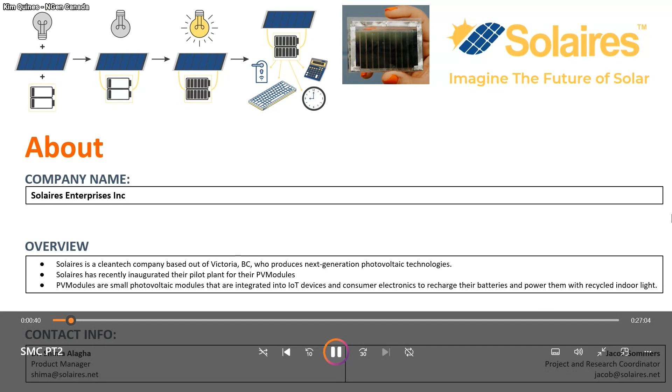With the success of this internal recycling project, we can develop perovskite photovoltaics which cost 75% fewer GHGs to manufacture than traditional silicon photovoltaics. This proposal targets recycling the specialized glass from devices which do not pass QC during manufacturing, or those which are recycled from their natural end of life. These recycling processes will require large amounts of solvents, which this project aims to recycle as well.

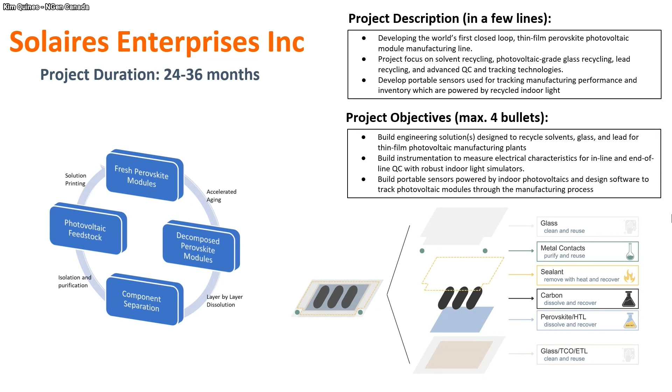In order to maximize our manufacturing efficiency and therefore reduce our GHG impact, we are looking to implement smart tracking and automated quality control measurements. Today, we are looking for partners in this project who will join us in this task.

We are looking for a company specialized in chemical recycling who will develop the world's first commercial thin-film photovoltaic recycling machinery. We are also looking for a company who will help us build inline and end-of-line QC tools specifically targeting indoor photovoltaics, which would include photoluminescence spectroscopy and current voltage testing.

We are also open to partners with projects and ideas which will support closed-loop smart manufacturing, but we have not considered. We are eager to hear your thoughts and discuss where we can expand this project to include your solutions.

You're on mute, John. John, you're on mute. Thanks, Roshan. Okay, thank you for that.

So the next pitch is Terra Bioindustries, an Ontario headquartered company designed to create multi-industry solutions from agri-food waste. They've developed a platform that can break open the grains and separate the valuable components without compromising functionality. So let's hear Terra Bioindustries.

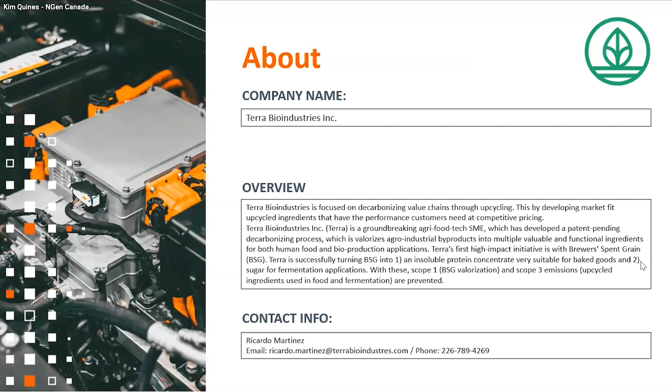We have already demonstrated our brewer's spent grain upcycling process at a pilot scale, and we have sent upcycled products to potential customers for detailed evaluations. Therefore, our project for the NGen Sustainable Manufacturing Challenge aims to implement and validate a full circular demonstration.

Where the unused part of the grains used in beer production is recovered, then upcycled using our energy-efficient process and converted into two ingredients: a plant-based protein, which we've named Proteina, and a sugar, which we have called Recyclose. The plant-based protein is meant to be used in food applications like baking, where it can substitute carbs with protein and fiber, therefore making sustainable and healthy food applications.

And the sugar will be used in fermentation applications like beer brewing, which initially provided the spent grains, closing the circle. Aside from producing two novel ingredients, this project aims to remove more than 30% of the current carbon emissions linked to grain disposal and agriculture intensification. This is because at least 60% of the carbon emissions of these products that these industries create comes from these sources. The amazing thing is that this project will be the first Canadian circular demonstration for food tech decarbonization.

By doing this, NGen contributes to facilitating a transition to sustainable manufacturing for brewing and food industries. For this challenge, we're looking to work together with Canadian breweries, Canadian baking companies, Canadian fermentation companies, as well as technical engineering teams to assist with pre-engineering and project implementation. Thanks everyone for your attention and time.

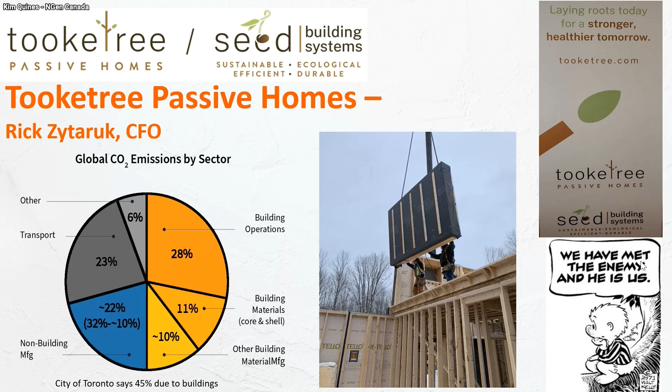Our mycelium hemp composite will be a game changer that addresses both problems. It will drive a major transformation of our building industry to build faster, help mitigate the climate crisis, and minimize the demands on our forest ecosystem.

Unfortunately, building at today's best would require clear-cutting significantly more timber, accelerating the climate crisis through decimation of our vulnerable forest systems. Mycelium can provide the transformative solution we need to build the homes we need, reduce the stress on our forest ecosystem, and still reduce the embodied and operational carbon from buildings.

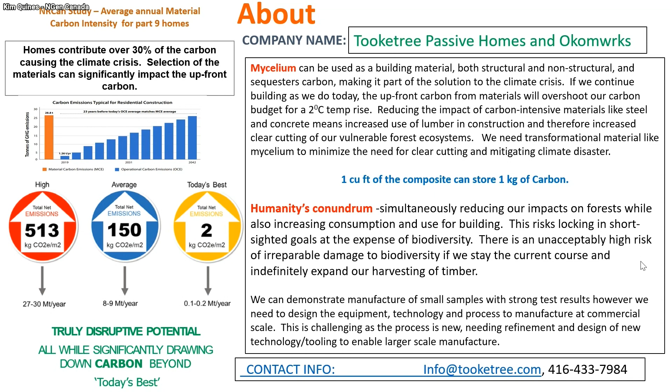We have developed a patented process to create natural building materials using mycelium and hemp, both carbon sinks. Nature generates the building material, which stores carbon for the life of the building. We can make a variety of carbon storing products: insulation to wrap building structures for wall and roof systems, sheathing, cladding, structural components. Currently, we can make small pieces in our research lab.

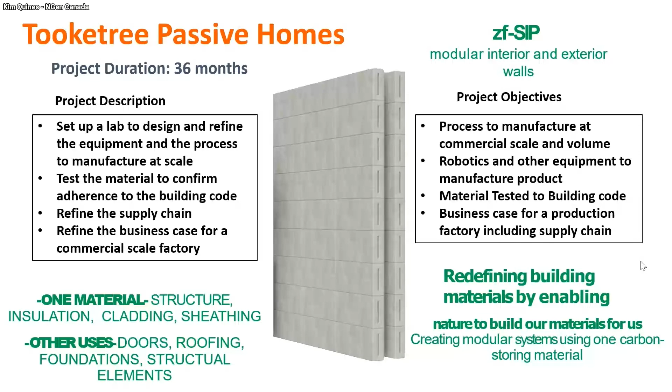This project aims to refine the process and the equipment, tooling, etc., to demonstrate what is needed for commercial scale manufacturing and do the lab testing to validate that the product meets the building code. We believe this material has the potential to revolutionize how we build, how we manage our biodiverse resources, and truly make buildings part of the solution to the climate crisis rather than a major contributor. Mycelium can bridge the gap to the future. Thank you.

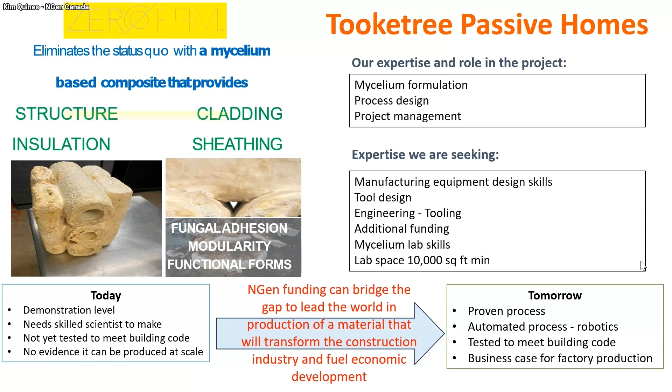Hi, everyone. There's so many fantastic pitches. Our next one is from BioAstra. BioAstra is a company headquartered in Quebec, an award-winning company with a technology platform of smart polymers and composites for health and clean tech applications. So let's have a listen.

Hello and bonjour. My name is Sumitra Rajgopalan. I'm the CEO of BioAstra Technologies, a biomaterials company based here in Montreal, and I'm here to present our bioelastomer platform as an alternative to polyurethane and seek partners in the Canadian ecosystem across the value chain.

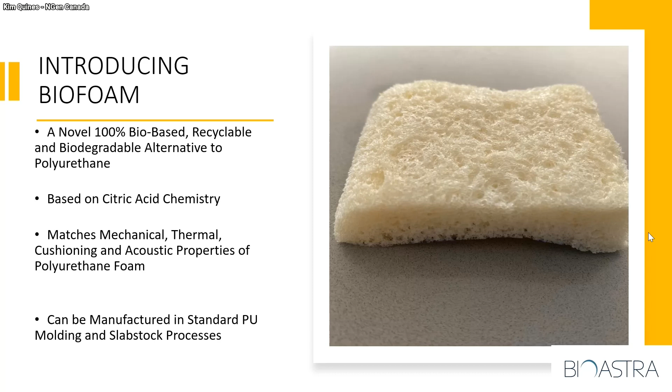Our goal at the NGen Summit today is to seek partnerships across the entire Canadian value chain in polyurethane foam or rubber manufacturing, be it injection molders, reaction injection molders, and slab stock foam manufacturers, as well as brands looking to be early adopters of this technology here in Canada. We'd be equally excited to hear from Canadian universities and other startups looking for other application ideas or to validate the underlying technology in a laboratory setting. We look forward to participating at the summit and to hear from all of you.

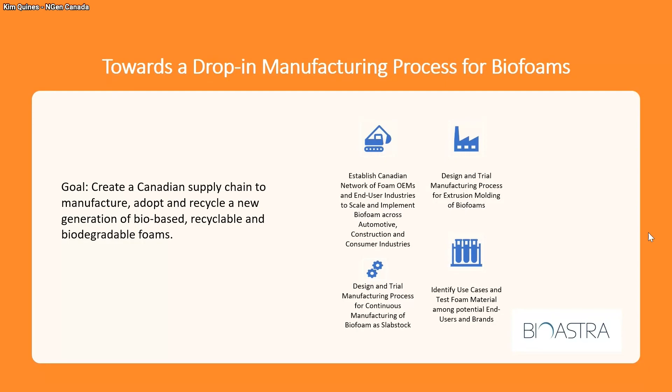BioAstra's role in this project will be as inventors and developers of the biofoam, and we look forward to partnering with foam manufacturers to scale and have this technology adopted by Canadian brands thereafter.

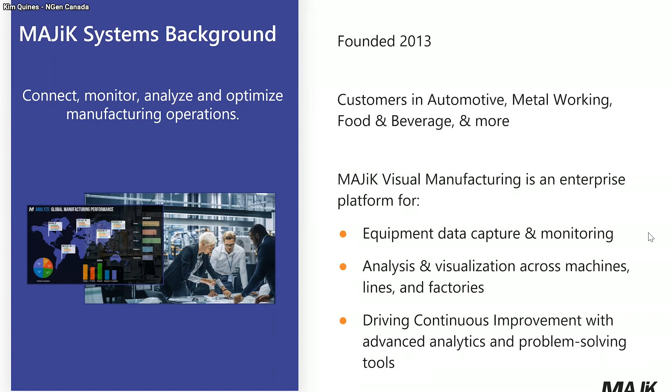Our proposed project would produce an enterprise solution that uses AI to drive best practices across multiple factories to maximize sustainability and efficiency. The objectives of this project include improving uptime and reducing resource waste with a holistic view of maintenance and operational best practices across factories.

Promoting the efficient use of resources and energy by minimizing unplanned downtime, driving waste reduction by highlighting the impact of defects and scrap, and optimizing energy usage by detecting consumption anomalies and their root causes. This will result in a solution that drives the continuous improvement process with AI-guided decision-making to maximize sustainability and efficiency.

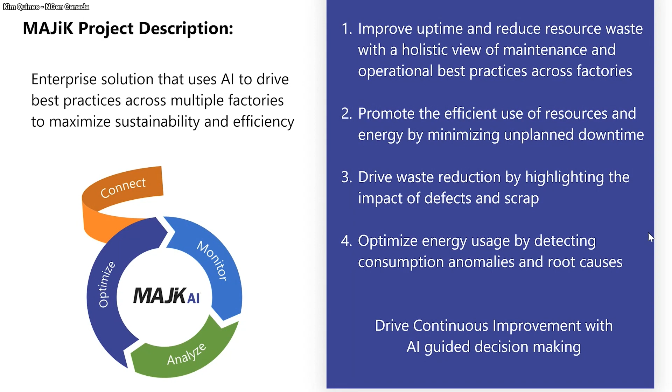MAJiK's specialization in this project includes capturing equipment data and providing a holistic view across machines, production lines, and factories, providing our MAJiK Visual Manufacturing tools to drive best practices, sustainability, and efficiency through a holistic enterprise view, comprehensive factory analytics, and streamlined operator interfaces.

And thirdly, driving key continuous improvement use cases by using AI to guide the decision-making process for improving downtime and energy consumption, maintenance, defects, and scrap.

We are looking to work with manufacturers to build and refine our solution. Ideally, these manufacturers would be in automotive, food and beverage, and metalworking, or other sectors with high volumes of discrete production, as well as manufacturers who have a culture of continuous improvement and a need for digitization, efficiency gains, and improving best practices.

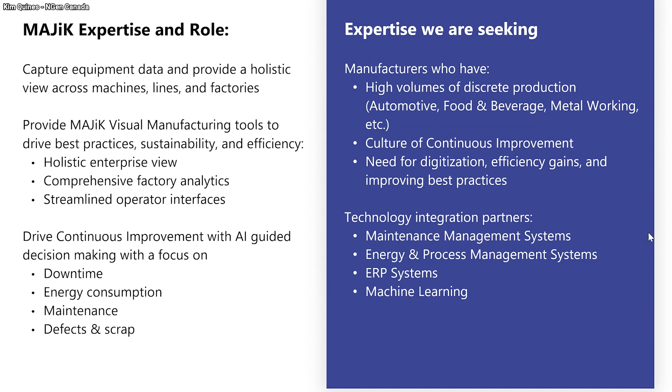We would also like to work with technology partners who are interested in driving their solutions with real-time equipment data. These could include maintenance management systems, energy and process management systems, ERPs, and machine learning solutions. Thanks for listening. We're looking forward to discussing this opportunity to work together.

Wonderful. So our next pitch is from New Earth Solutions. New Earth Solutions is a company headquartered in Ontario that is designing air filtration systems and looking to prove out their solutions in manufacturing facilities. Let's take a listen.

Hey, my name is Mitchell, the co-founder at New Earth Solutions. I'm really excited to share with you our technology because we have a solution to a real-world problem: the air we breathe. Our biological air filter leverages beneficial microbes located in the root zone of plants to metabolize and break down volatile organic compounds into non-harmful compounds.

We work with ASHRAE standards, specifically the indoor air quality procedure, to implement filtration inside of a building and reduce ventilation while still meeting adequate indoor air quality levels. Everything's been third-party tested through National Research Council of Canada and in compliance with the requirements of ASHRAE.

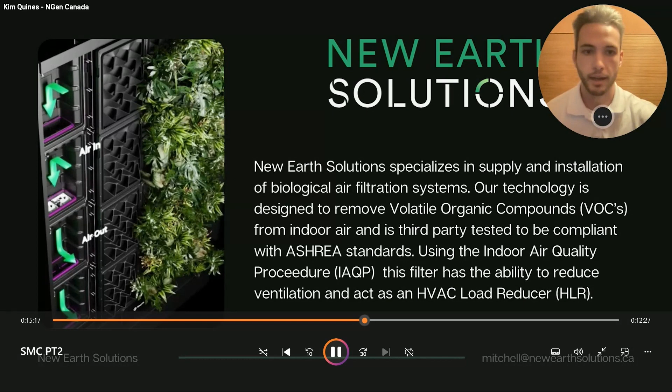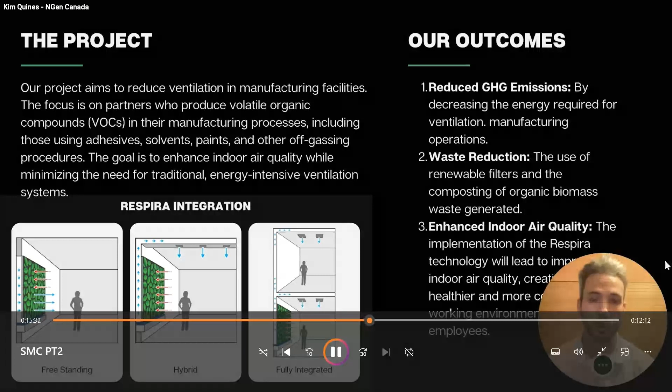Our outcomes with our HVAC load-reducing technology is to reduce greenhouse gas emissions through the associated ventilation needed in buildings through heating and cooling, as well as waste reduction, because we're converting harmful compounds into non-harmful compounds. We're not capturing and throwing away filters like other technologies. We're also enhancing indoor air quality, which involves improving occupant well-being for people working in buildings that have poor indoor air quality.

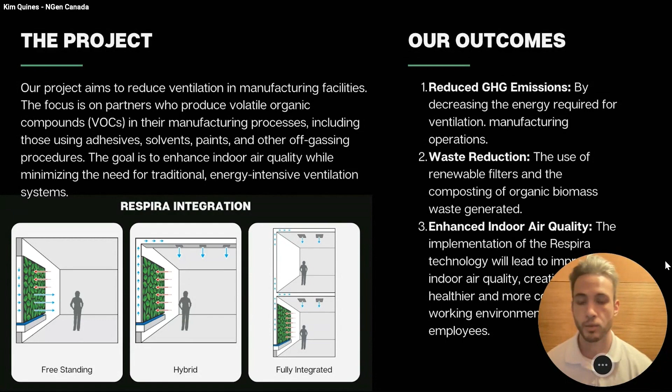And ultimately, we're looking to partner with a manufacturer who produces a significant amount of VOCs in their manufacturing process. This could be through solvents, adhesives, paints. And by working with us, we are a turnkey solution. So we handle everything from the design, construction, and implementation of the technology, as well as provide tools for mechanical engineers to leverage the indoor air quality procedure and formula so we can ensure that everything is up to code.

We're ideally looking to do a project in Southern Ontario in a facility with 10,000 square foot or more of air that we can clean. This will allow us to demonstrate a significant improvement to energy consumption and the overall sustainability of the manufacturing process.

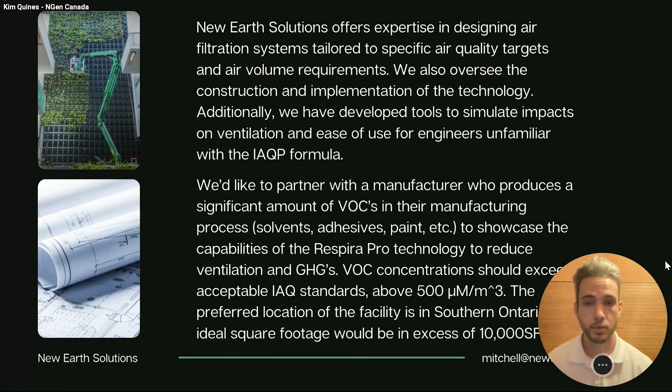So next up, we have Panevo. They are headquartered in BC, and they develop and deploy tools to layer on top of industrial data systems, and they apply machine learning and advanced analytics to existing data sets. This helps to enable industry to minimize waste, produce products optimally, and optimize energy management. Let's listen to their new project.

Hi, this is Stacy Bondariva from Panevo. At Panevo, we specialize in energy process optimization for industry, and this NGen SMC project is to develop and test AI-enabled functionality in our Energy Management Information System, or EMIS, software. Panevo helps manufacturers achieve climate goals, reduce cost, and improve competitiveness.

We have a team of engineers, Sigma Black Belts, and energy managers that specialize in projects to reduce utility use and decarbonize facilities across North America. Our software offers real-time tracking of utility and production performance data, providing one source of truth for your operational data to really drive informed decision-making and efficiency.

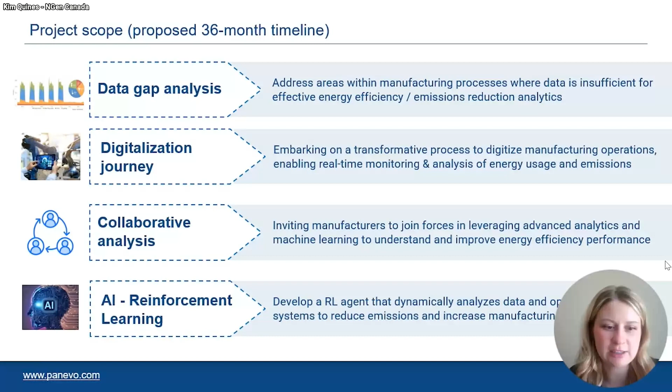We'll then leverage that data to understand your current performance versus what is achievable, and we'll implement, test, refine AI and reinforcement learning to extract further energy savings across your facilities. The new technology will involve deep learning and AI-enabled functionality to deliver savings beyond what a standard EMIS solution would be able to provide. The project objectives are very well aligned with NGen's SMC objectives.

We anticipate making significant emissions and energy reductions, supporting digital transformation, using data-driven decision-making, and forming long-lasting partnerships as we have with many previous customers. Panevo will provide expert support with the NGen application and project management. We'll use our expertise to find data gaps, unlock efficiency gains, and deploy and test our AI-enabled functionality to find further carbon emissions and energy efficiency gains.

We're really looking for partners interested in deploying EMIS across multiple industrial facilities with a need to decarbonize, to reduce expenditure, and have personnel that are either familiar with energy efficiency practices or are willing to learn and support this process. We really look forward to working with you as we embark on this utilities conservation digitalization journey.

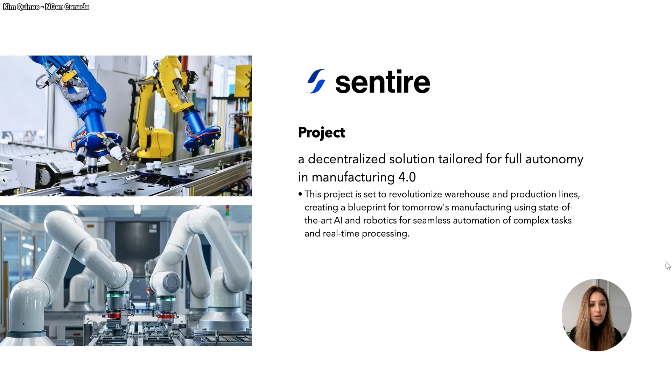But to do so, they should be able to see, act, and react or navigate dynamic environments where data is constantly in flux. So they need reliable software to adapt to a changing environment and work in unison to perform a complex task. That's where our solution comes in. We propose a decentralized solution tailored for manufacturing 4.0. This project is set to revolutionize production lines, creating a blueprint for tomorrow's manufacturing by combining AI and robots for automation of complex tasks and real-time processing.

We use AI to improve the precision of robots and therefore enhance productivity and reduce greenhouse gas emissions. Plus, our decentralized solution helps manufacturers manage their operations by avoiding errors and material waste, and therefore reduce energy for green production. These advantages make us a very strong choice for any corporation looking to automate their production at scale. In the realm of material handling and assembly, our solution stands out for its scalability, robustness, and adaptability, representing the next leap in autonomous manufacturing.

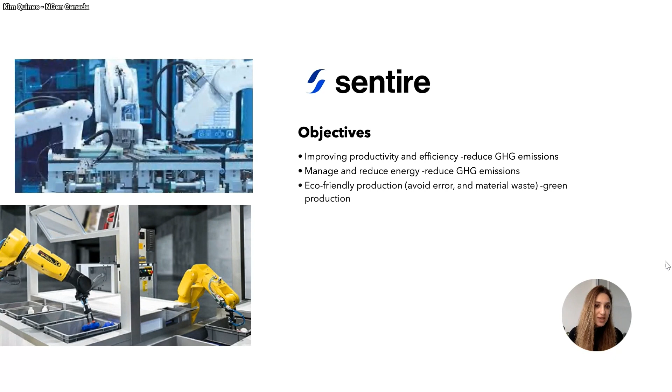This is why our team should be trusted with a project of such caliber. Plus, our dedication to open innovation and mission-focused approach fuels our determination to deliver exceptional results. We offer AI software that enables robots to collaborate and cooperate using machine vision and learning. While our competitors are focused on individual robots, we are leveraging group behavior and advanced technologies such as 5G and Edge AI to maximize efficiency.

Groups like Amazon have shown the immense value of autonomy through the utilization of fleets of collaborative robots. This approach not only optimizes speed, robustness, and efficiency, but also contributes to the reduction in greenhouse gas emissions. The same technology can be adopted for autonomous manufacturing in a broad range of applications. Now is the time for your organization to seize the opportunity and be at the forefront of future manufacturing in Canada and beyond. Thank you so much for listening, and we look forward to the prospect of working with your teams on this project.

Okay, thank you. And our last pitch for today is from a company called Xiera. Xiera is a company headquartered in Ontario and has developed the first auto tuner for fuzzy logic control. So let's hear from them.

Hi, folks, and welcome to this introduction to Xiera Technologies. We're an AI for Manufacturing Canada company, and we've developed the first automatic tuner for fuzzy logic control. Fuzzy logic control has been shown to be typically around 5 to 35% more energy efficient than conventional control algorithms like the PID. It's been used in hundreds of different applications, but despite the known benefits, the PID is used like 99% of the time because it's easier to tune. So we've solved that problem with our AI tuner, opening up fuzzy logic to wider use.

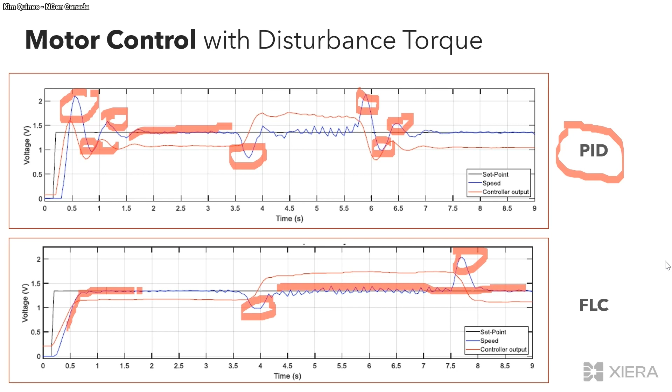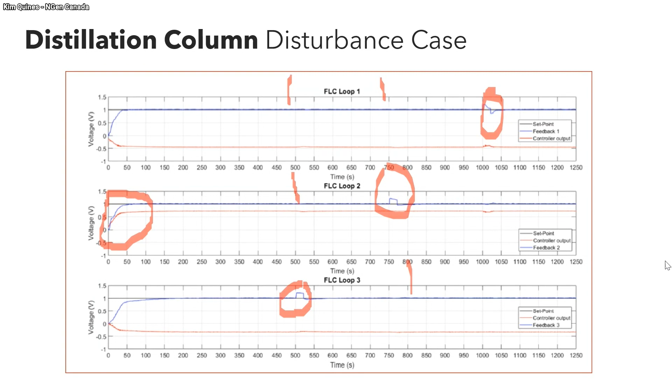So what's the relevance of this? Well, one thing you should know is that we're currently the only company we know of that can do multivariable fuzzy logic control. We can do something like a 3x3 system like the one you see here, or we can also do, for example, a supervisory controller. If, for example, you have like 7 air compressors or 4 chillers or whatever it is, and you need them to work together, and the graphs look very similar to what I showed you earlier, where there's overshoot, there's undershoot, there's slow rise time, there's all these problems, we can actually help to minimize that.

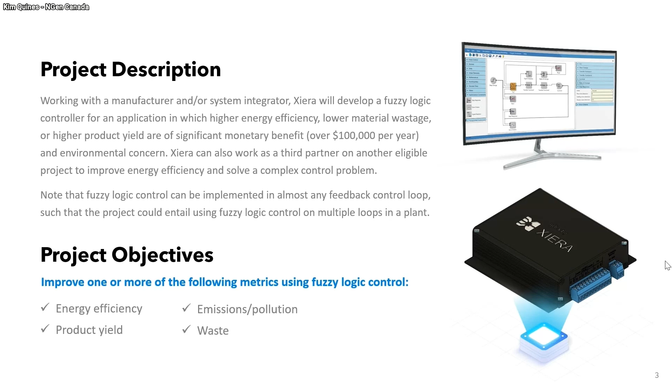So now that you understand what we do, understanding the project is pretty simple. We put fuzzy logic control on a process of your choice to get those 5 to 35% greater efficiency benefits. Obviously, the higher the energy cost or environmental footprint, the bigger the impact fuzzy logic will have. The other thing to consider is that we don't have to be an independent project, but can also come in as part of another cluster. Many of you are going to be doing power generation or carbon capture or some other really big project. And NGen likes big clusters. So if we can come in and just add fuzzy logic as part of that larger project, that can be of great benefit.

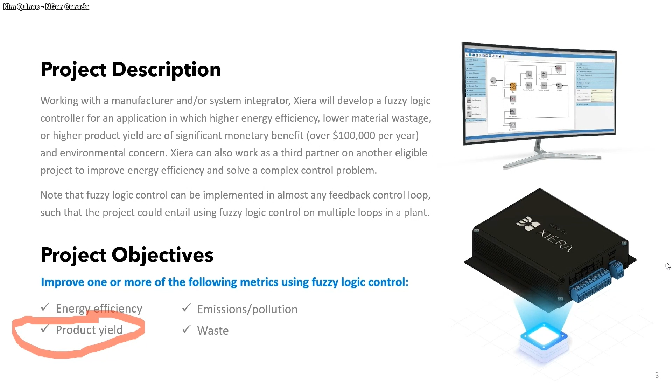So that was our last pitch. John Sigana, if you want to join me. Oui, parfait. Yep. So that was the last pitch. So we had 20 pitches. I hope you found them useful. And the 21 partners, hope you are networking with them. We have another networking session right after this, and it'll keep on going till at least 3. And if you want to stay on, we can leave this platform open for a bit longer. The 240 plus attendees showed up, so it's a good turnout.